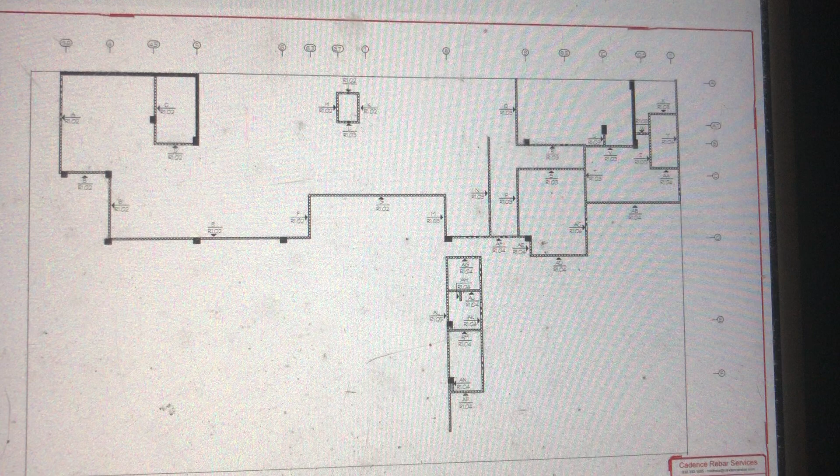All right, here's your shop drawings. This is showing you every wall on that floor.

You probably already know this part, but I'll start out like this. It says A, that's the A wall. That's the C wall, that's the D wall. You just follow each wall.

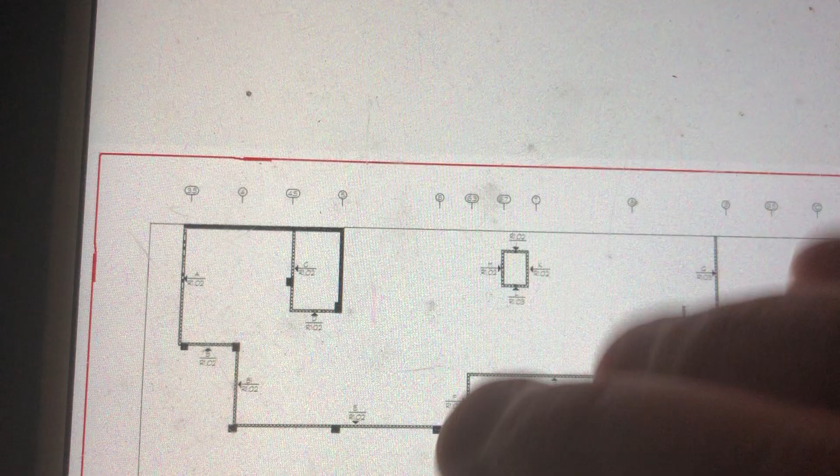Okay, now let's go look for the A wall. There's the A wall, see that number, elevation A? So that's telling me there's a big double door. There's a barrier wall, like a crash wall made out of concrete, and my block wall sits up there.

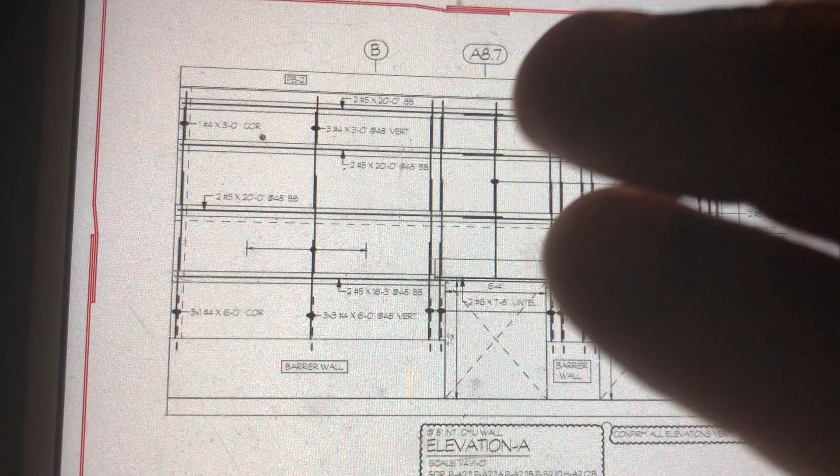Here's how you also read the build set, but we're trying to figure out the rebars. So what this number is telling us is that there's number 4 rebars.

The rebar's 6 foot tall, and they're every 48 inches vertically. So every 48 inches coming from the corner, I've got to put a vertical rebar every 48 inches. But it's got to be a number 4. So it's very important for me to know that number because that's what I order from my purchase order.

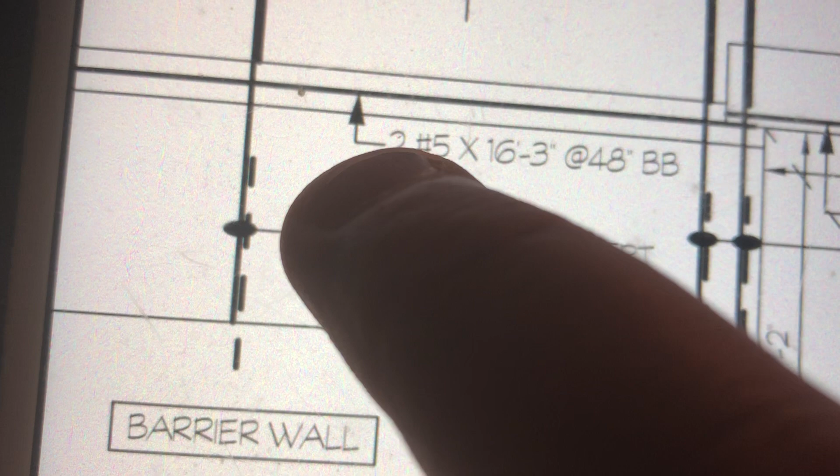This is also telling me there's a bond beam mark all the way across, and it's showing a long rebar. It's actually telling me I need 2 number 5 rebars, 16 foot 3 long. That's very important.

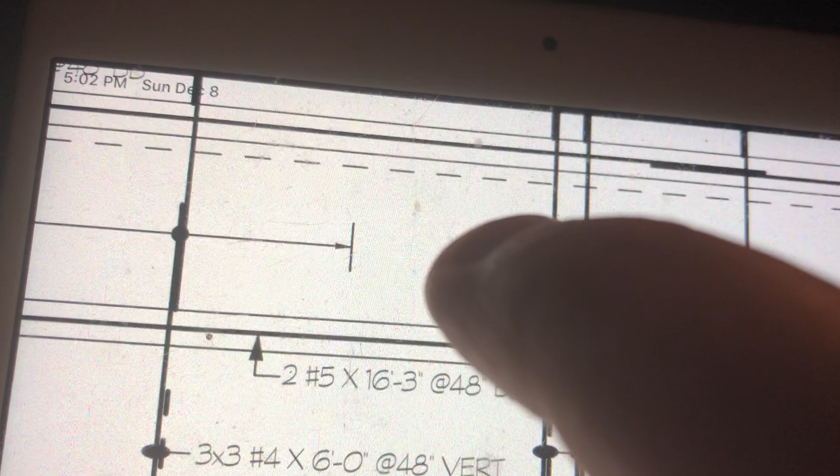At 48 inches, from the bottom floor, or wherever this is, to the top, that line right there is 48 inches. On my particular job, every 48 inches I have to put a bond beam. So that's pretty simple, but it's just a lot of information.

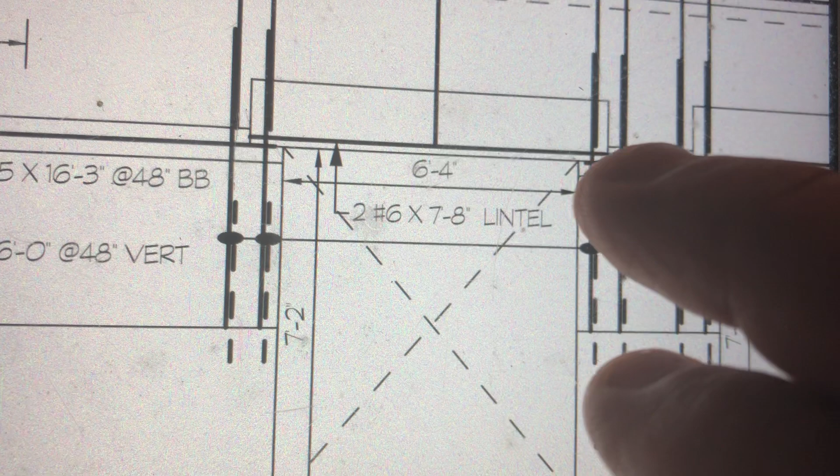At the door here, it's telling me to put 2 rebars on each side of the door. Now see how this arrow is pointing to the bond beam over the door? It's telling me to put 2 number 6 rebar, 7 foot 8 long. See how it's 16 inches more? That represents 2 blocks.

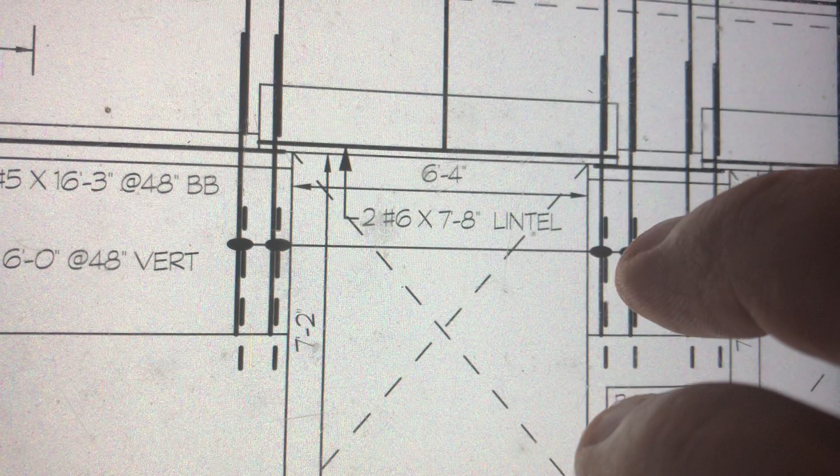Because it's such a wide opening, you'll have a chart telling you if you're so many feet long, you got to put 2 bond beams. So you'll have a chart on your build set that tells you if you're 6 foot 4 or over, or 10 foot, you got to put 2 bond beams. If you're 5 foot 4, you only put 1 bond beam.

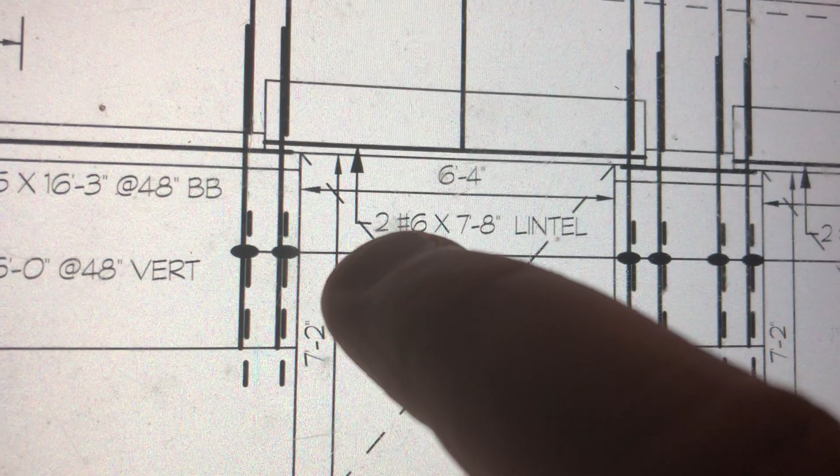But remember, you have to order some number 6 rebars. And you sort of go through your plans and see how many number 6, or how many feet of number 6, you got to get.

And when you order your number 5s, on this particular job, our number 5s are the long bars that go into the bond beam. So you'll buy 20 footers to go there and cut them to fit.

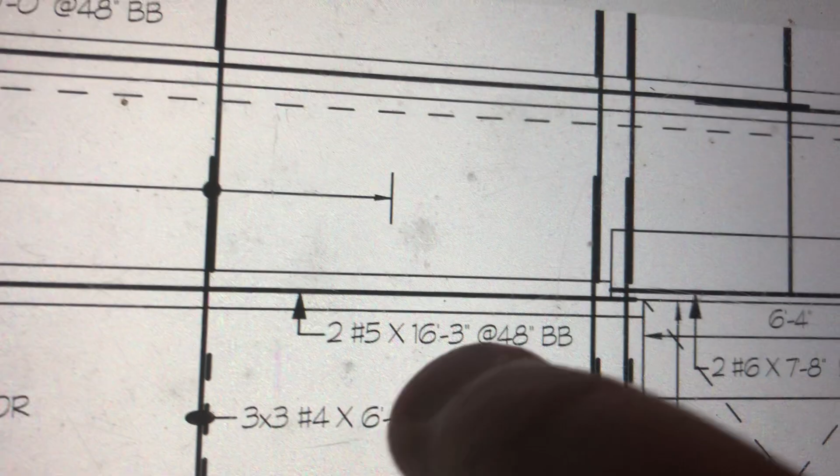These I ordered. I ordered 100 number 4s already cut 6 feet. They're pre-cut, you got to tell them that. You cut them 6 feet or whatever. That's my vertical on this particular job.

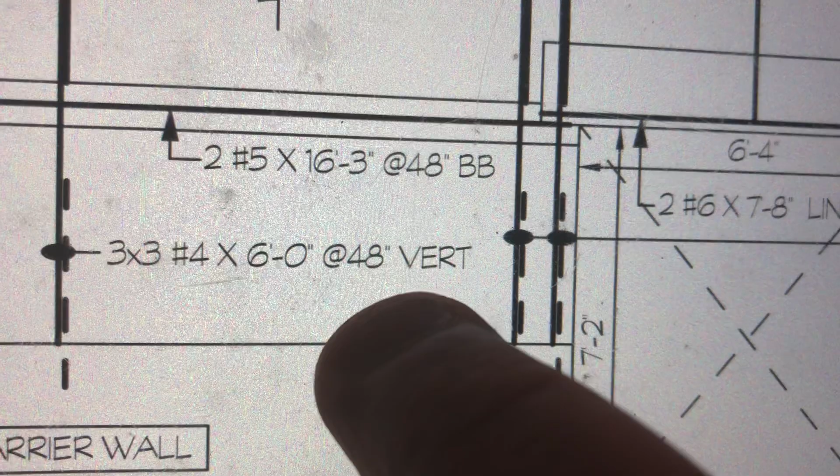It shows you on this side, door 2, there's 2 on this side door, but every end has to have a rebar too. So there's 3 right there.

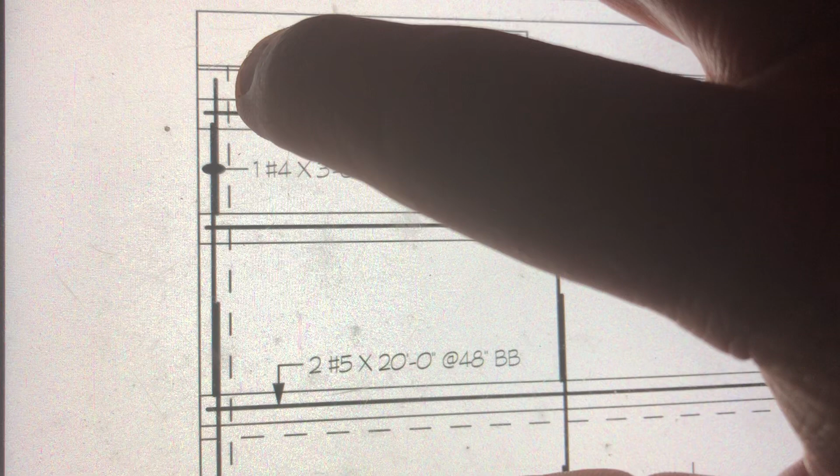Let me see if I can see any more samples for you. All right, see this line right here that goes slot, skip, slot, skip, slot, skip? That means there's an adjoining wall that butts up against this wall, or that's a corner.

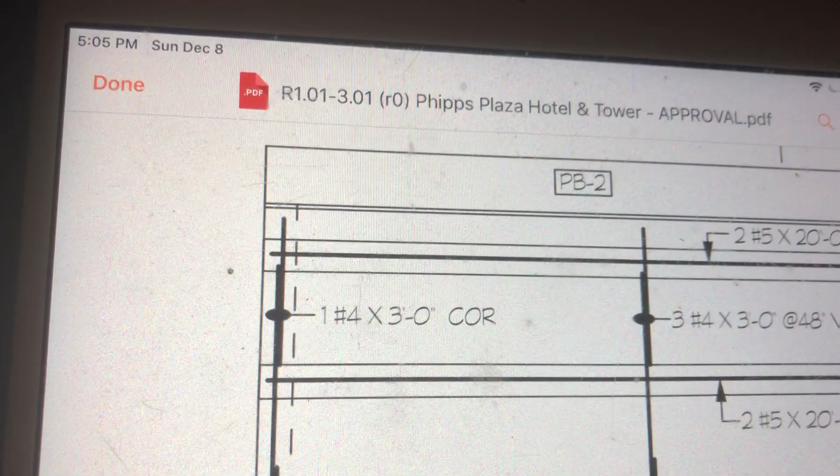And on these corners, every bond beam has to have a hook bar coming out, or 2 hook bars coming out, to connect both of the walls together. You got to remember that. And so there's a number that goes along with that.

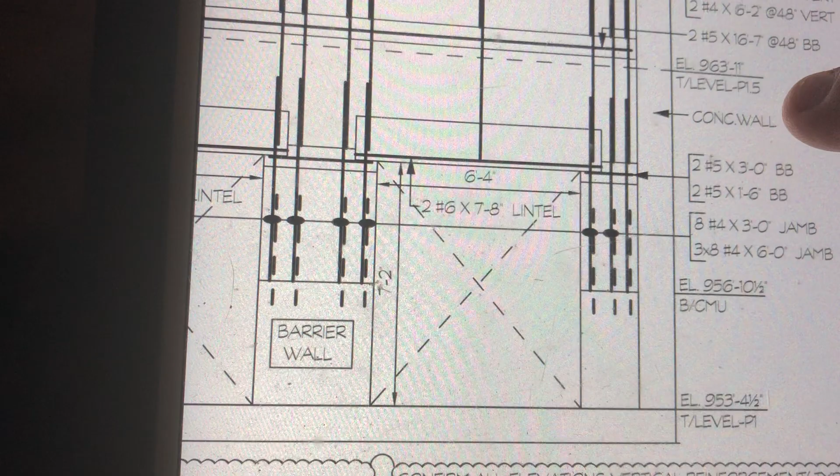Let me see if I can find that number. Might not be on this particular wall. Just find a wall with a number on it, hook bar number. Hang on, let me show you something.

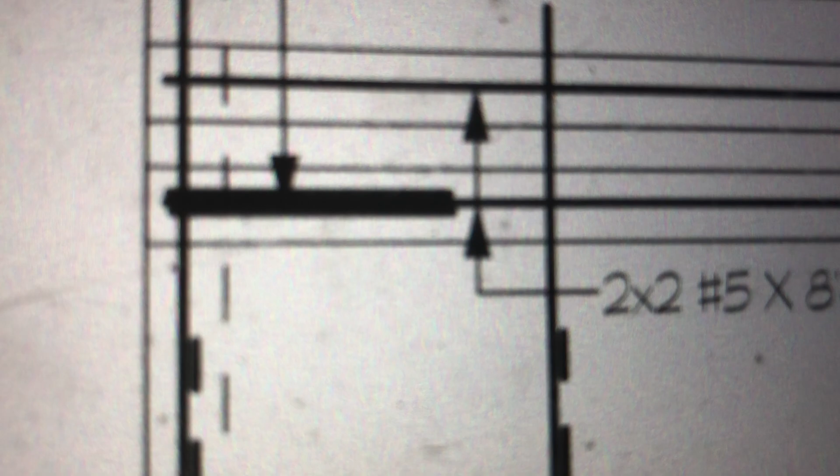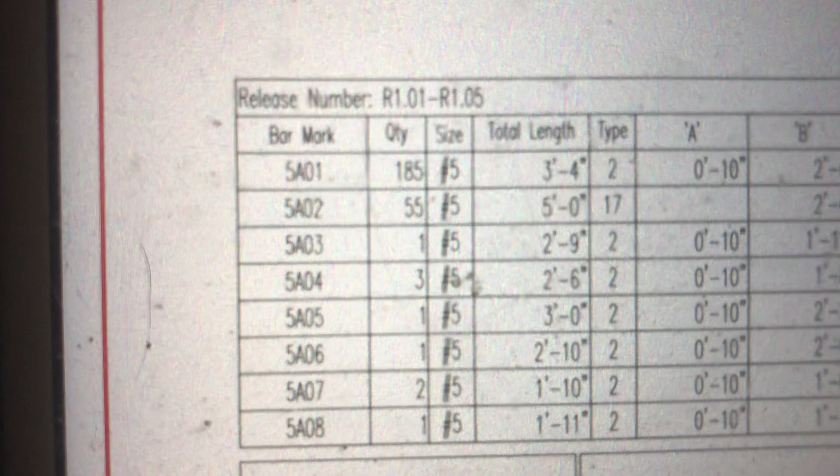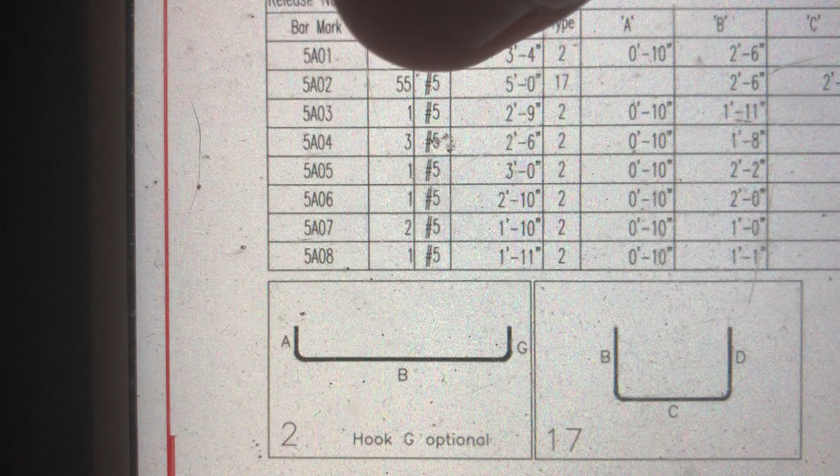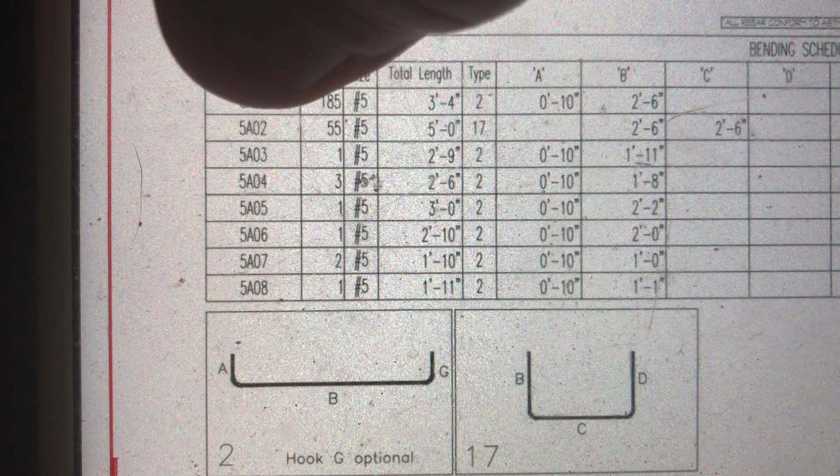Well, what you gotta do is go to the chart that they give you. See how that's a hook bar? And there's those numbers again. 5A01, 5A01, 5A02, and it tells you on this particular floor how many you're gonna need. You're gonna need 185 of the 5A01 on that floor, you're gonna need 55 of the 5A02s on that floor, and also they're gonna be number 5 rebars.

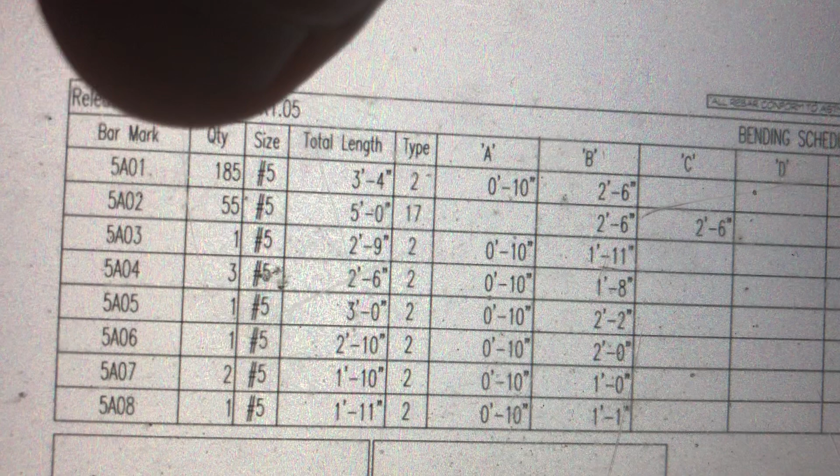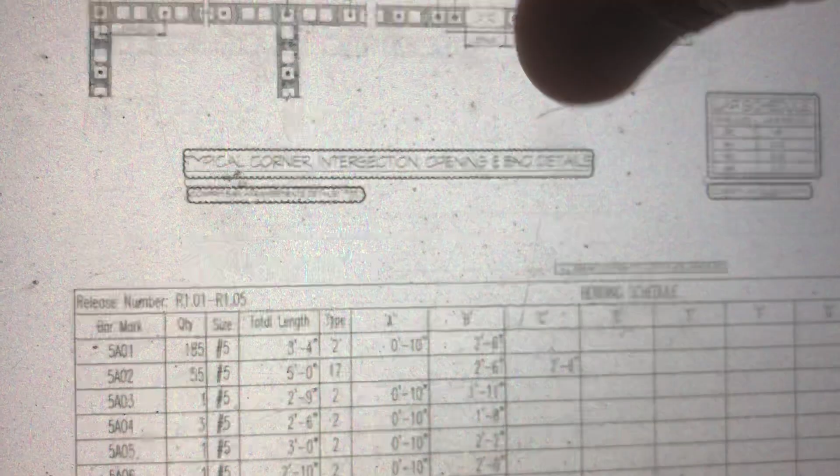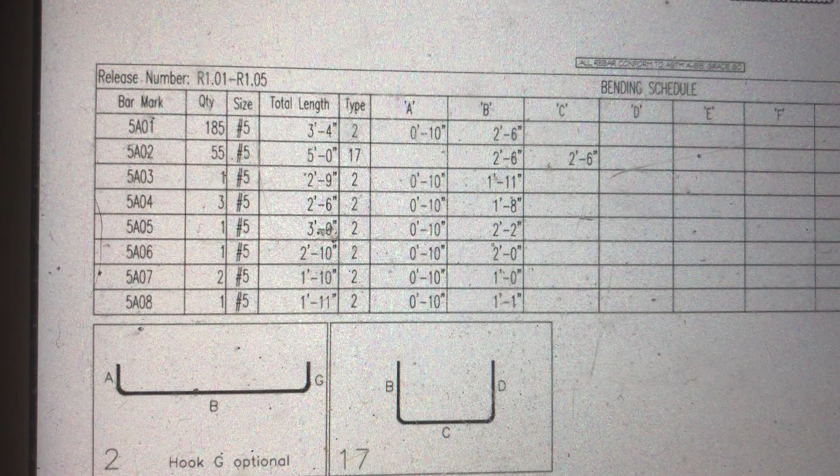So it tells you the length, but you don't really have to know this. When you give them this number and tell them the quantity, they know what to manufacture, how to make them. You'll find them in your purchase orders. Whoever's supplying your rebars, you just look through your purchase orders. Like this particular job, I think mine is new construction material. I just gave them that number and told them the quantity, and they automatically know this chart. They got the same chart I got.

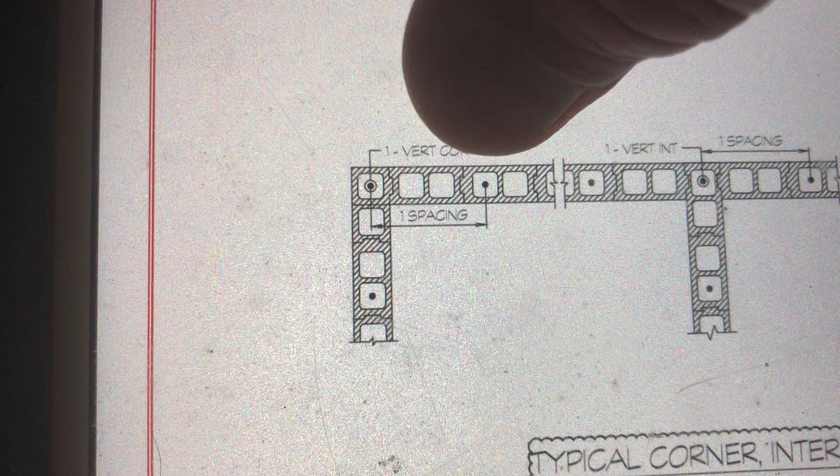And this wall right here is my example wall. This is what they expect out of me. They expect the rebar in the corner every time, then go 48 inches like they want, right? And if a wall's a T-wall and it butts into this wall, they want me to have a rebar right there. And if there's an opening, like a door or a window or vent, they want 2 rebars on each side. And at the end of the wall, they want a rebar. Then you go 48 inches, like that.

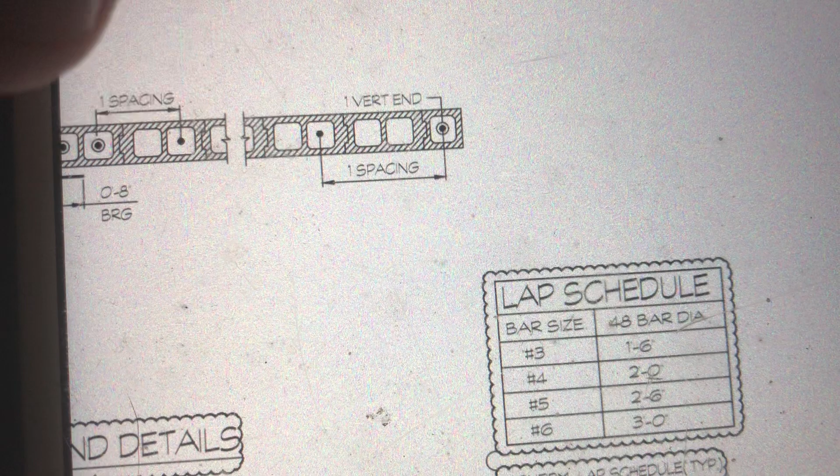So if you start your 48 inches over here, 48 inches, 48 inches, 48 inches, all the way down, you've got to put that bar. But if your 48 inches lands here, you got to put it there. You got to remember that.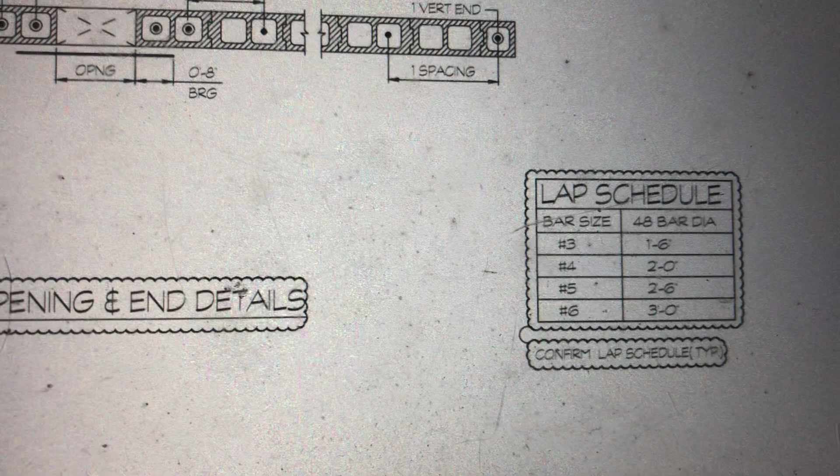So it's pretty simple stuff. And then you got this thing. This is showing you all the samples of each wall that's going to be on your floor. So there's some walls that are going to have door openings. That's a door. It's showing you how you do it at the top.

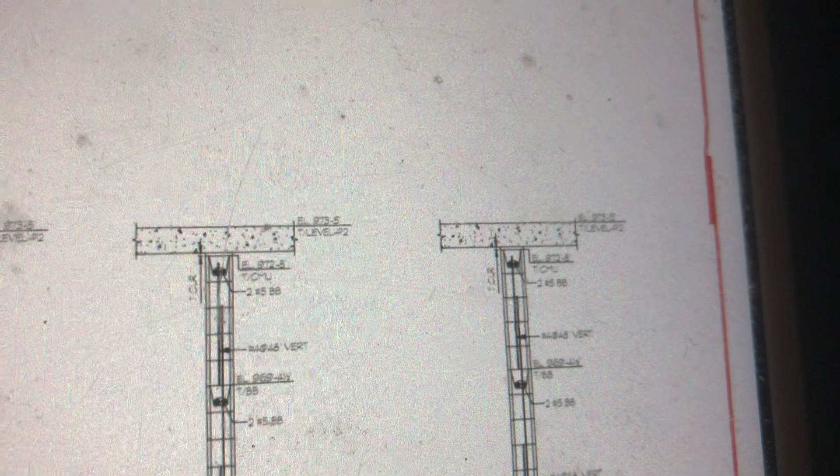Then you go every 4 feet for a bond beam. Now, some jobs ain't every 4 feet. Then there's some walls that are going to start at the bottom on the floor. It's going to continue like that. And it shows you also there's an inch joint at the top.

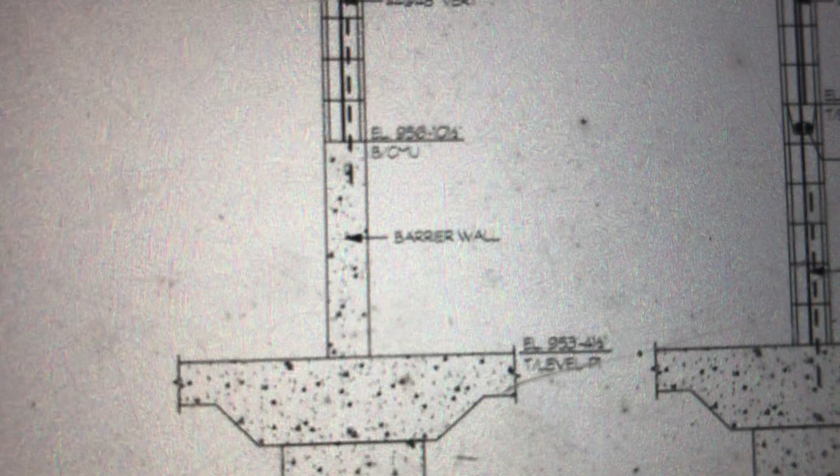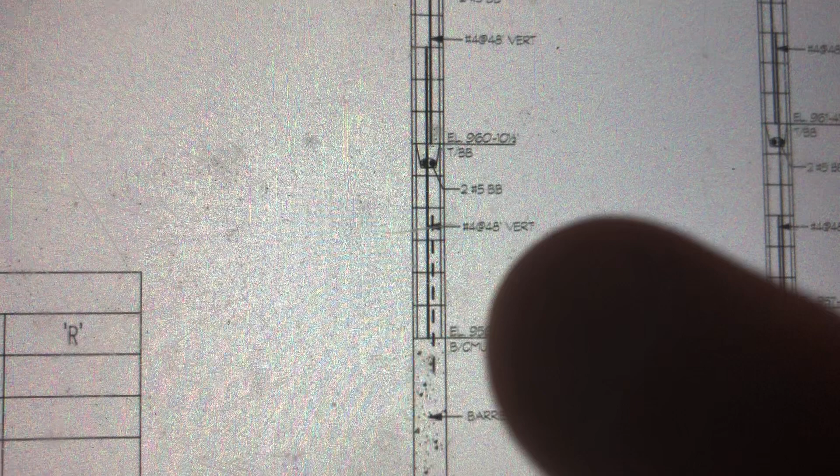Then it shows you this particular job's going to have some crash walls in it. It's at a parking deck, and they made a concrete wall, and then we start a block. Now, we start off with a whole block. See how it has a whole block? And it says go every 48 inches, every 4 foot there's a bond beam. Now, some jobs, you start out with a rip. But you'll get a benchmark and measure down and put your rip. You got to make sure about the rip thing.

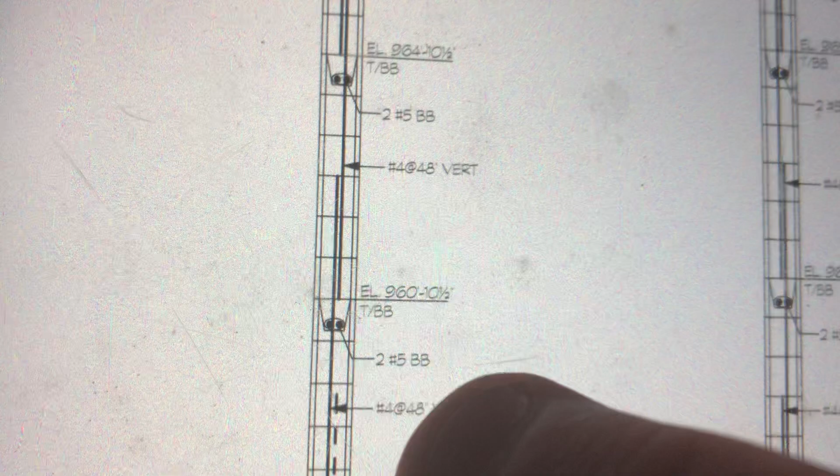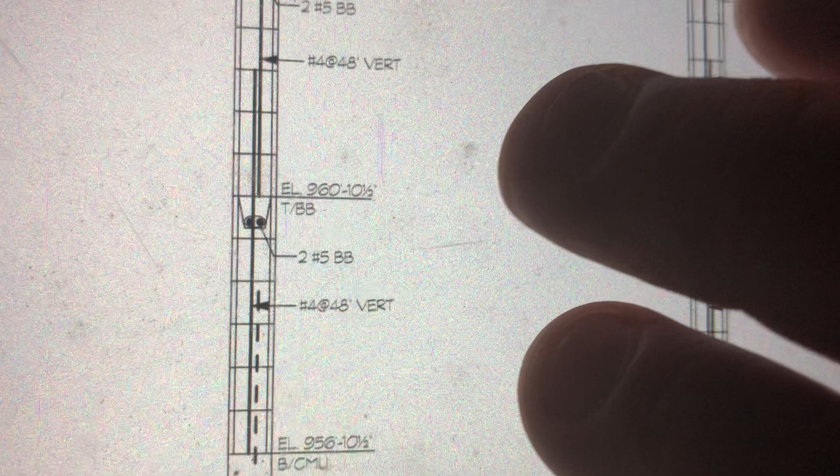And see this big number? This is above sea level. This is the way they calculate it. They started doing, I don't know why they do this junk. They should have just said 4 feet or something. But what you do is you measure, you minus the small number off the big number, and then it'll say 4 feet. That measures up to 4 feet. Pretty simple to do. It ain't no rocket science or nothing.

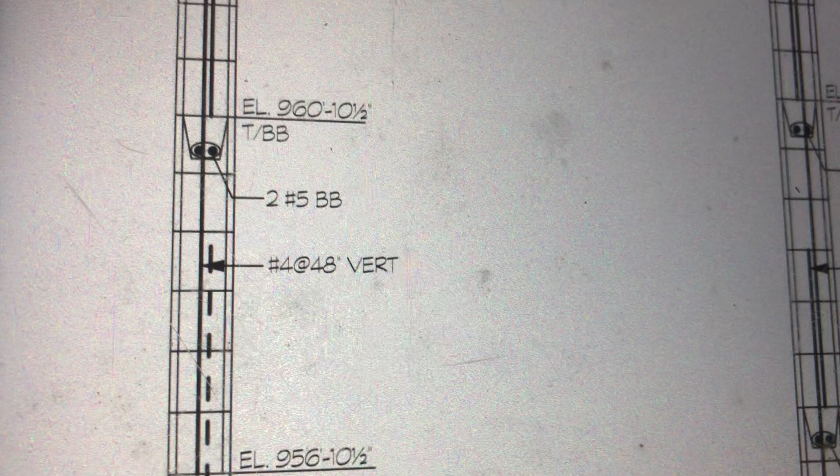But you got to remember, 956 feet, 10 inches and a half. You got to remember how to do that math. If you got one of them yellow calculators, you can use that, you don't have to think about it. But if I just thought about this, I just take my calculator and minus that big number. Now look at this number, it minuses the same, so it's 0. That's pretty simple stuff. All right, that's it.